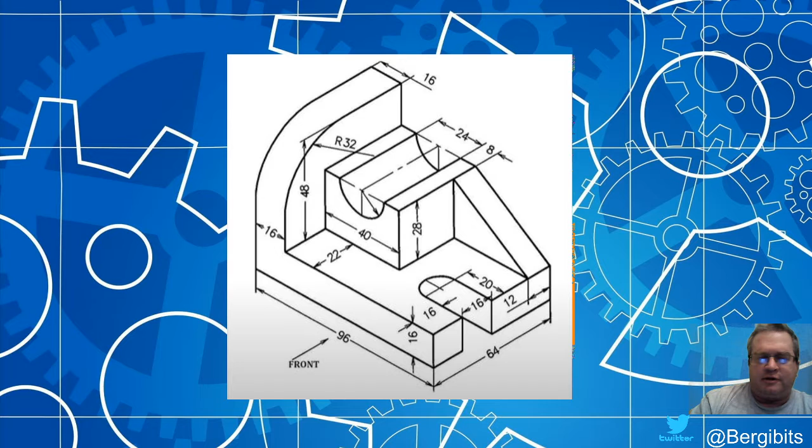All right class, we're going to learn about building a sketch in Autodesk Inventor with an isometric sketch. First we're going to build this base, which is 64 by 96 by 16, 16 thick, 96 long, 64 wide, in millimeters. Then we're going to build this, and then this, then that. All right, let's get started.

First you're going to go to File, New, Create New. Go to Standard Millimeter, Create. Then we're going to select 2D Sketch, and select the XY plane.

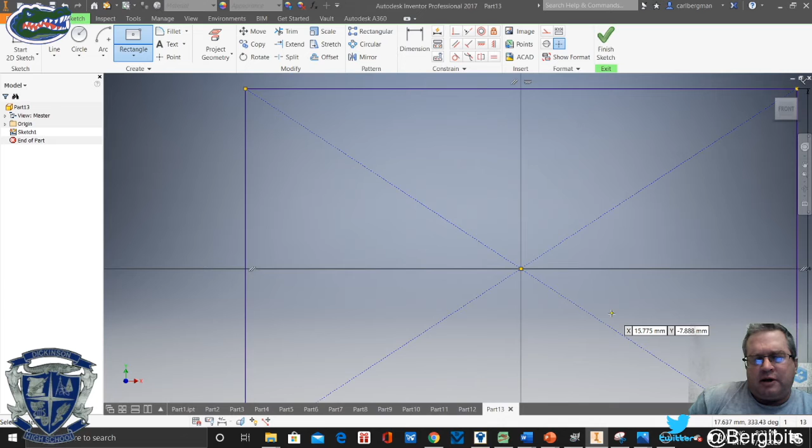We're going to go to Rectangle, create a rectangle from the center. Hover over the green, make sure it's green. We're going to go 96 by 64. You can push tab, it'll switch you from box to box. Zoom out a little bit so you can see what you're doing. Check your isometric sketch, 96, 64, correct.

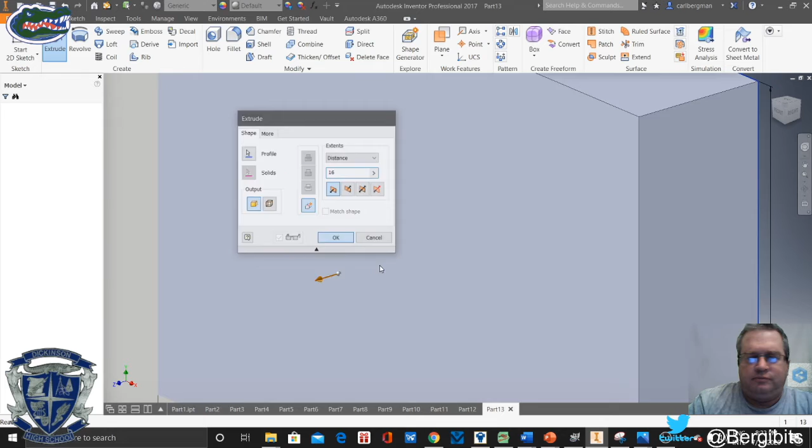Now we got to go 16 on the extrude. Right click, OK, done with that sketch. Now we're going to extrude, we're going to go 16. So I've got 96 by 64 by 16.

Now we're going to make that rectangle on the back stand up, and it's going to be 16 millimeters wide by 48 tall with a 32 on the fillet.

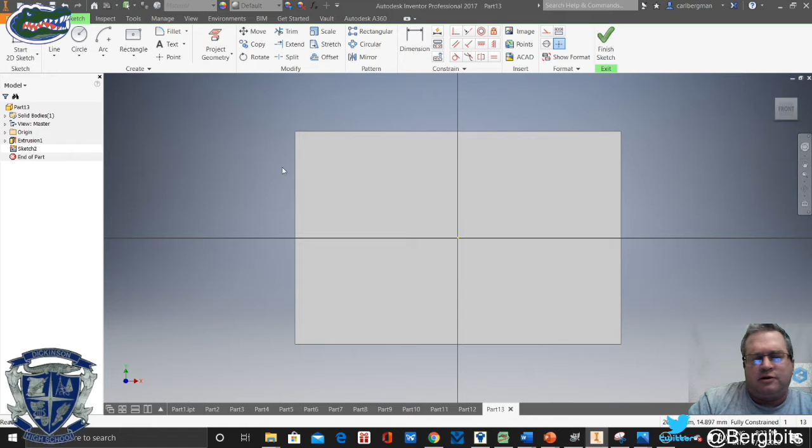Select the surface, go sketch, and we're going to create a rectangle, just a 2-point. Make sure you hover over and make sure it's green so it lines up with that corner. Just selecting where you want to go, you click, and we're going to have to do the collinear constraint tool. It lines it up, so now you're lined up top and bottom.

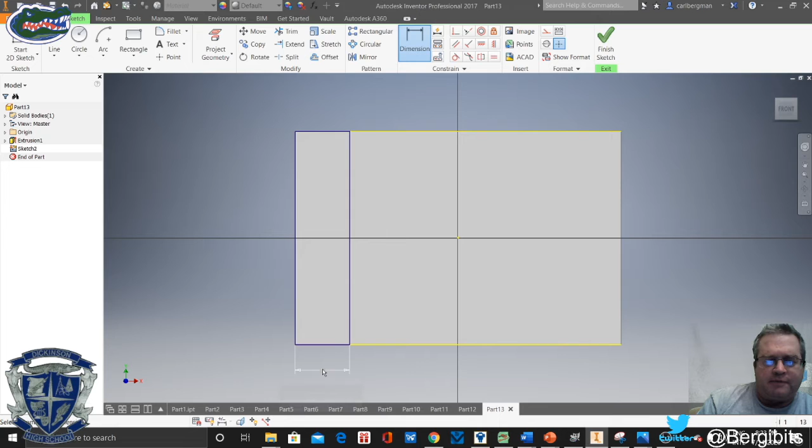We're going to go dimensions, and you're going to go 16. Click, hold, and drag on the dimensions. Right click, OK, finish sketch. Now we're going to extrude - told you we're going kind of fast. We're going to go 48, extrude, and we're going to flip that around.

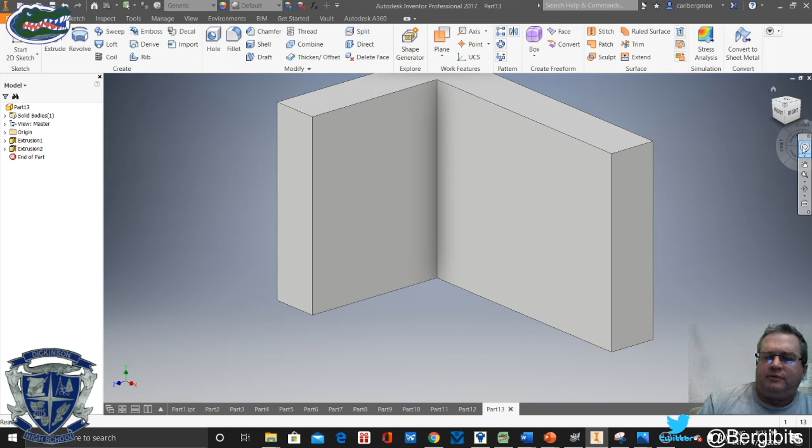Check, OK, it's going to be a 32 on the fillet. So you can click, hold, and press shift, and it'll rotate around the axis there if you want. Go left a little bit, bring it down. All right, get rid of the navigation tool. Yeah, that's good enough.

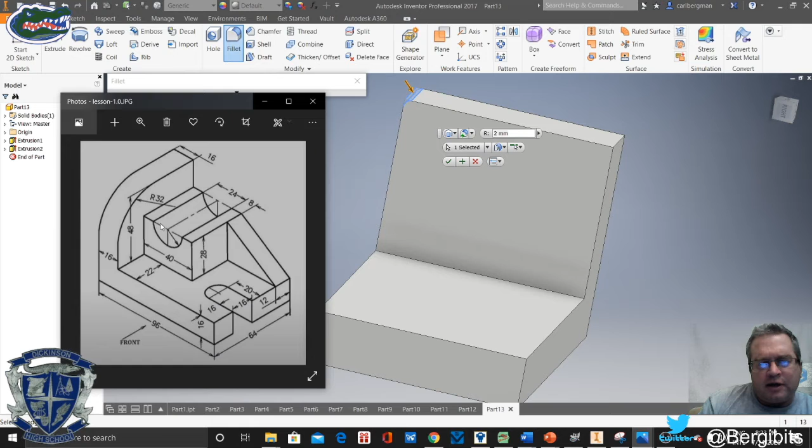All right, now we're going to go fillet, and you're going to click that edge, and it's going to be 32 on the fillet. So you're going to minimize that, bring back, go, put in 32, and click your check mark. There you go. That's the back side done.

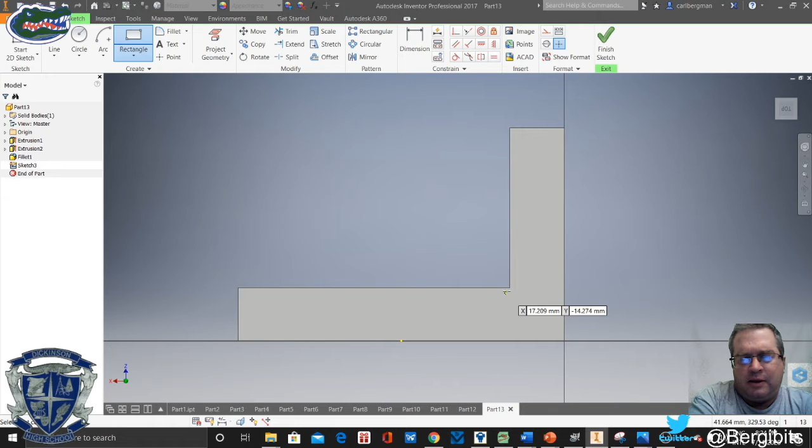Now we got to click on the surface, sketch, bring it down a little bit, and we're going to put a rectangle anchored into the corner. Hover over, make sure it's green, or it's not going to line up right. We're going to go 40 by 28, I believe.

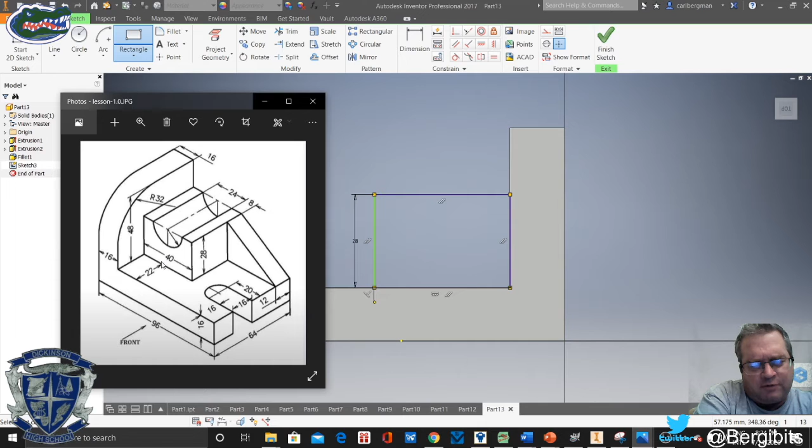40 by 28, 28 tall, 40 long, and we're going to go 42 deep because you got that 22 right there, and then the 64 on the base. Well, 64 minus 22 is 42, so that thing we're building right there, we're going to extrude 42 millimeters. We're going to click OK, finish sketch, and we're going to extrude 42 millimeters. And we're going to select that second one to reverse it, go in the opposite direction.

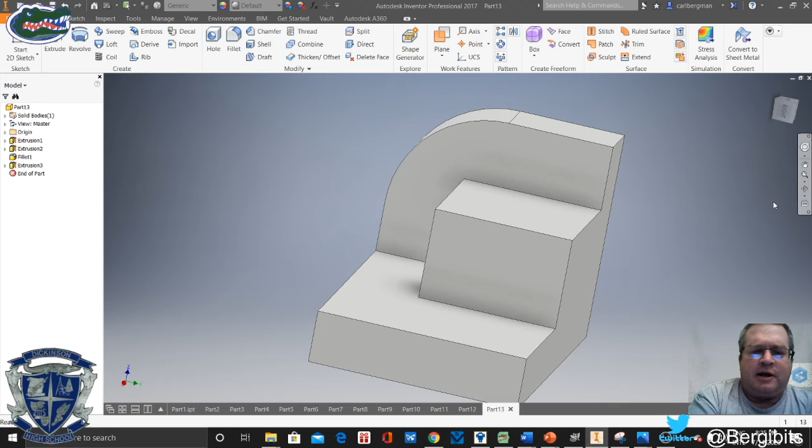There we go. Now we got to cut that semicircle in there. Select the surface and sketch, bring it down a little bit. All right, now we're going to select circle, and we're going to hover over until we get the green dot, and that'll be the center.

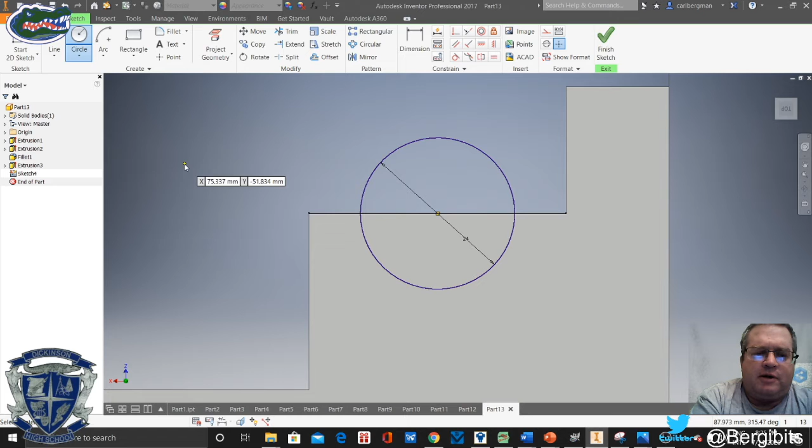And then we're going to go 24 millimeter. 24 millimeters is going to be the center of your line and your circle. So 24, click, check the diameter, there it is, 24, and we're going to right click and click OK. Finish sketch, and we're going to extrude. This time we're going to cut, and we're going to go 16.

And we're going to go that direction, and then we're going to press OK, and there he is. Okay, going pretty quick.

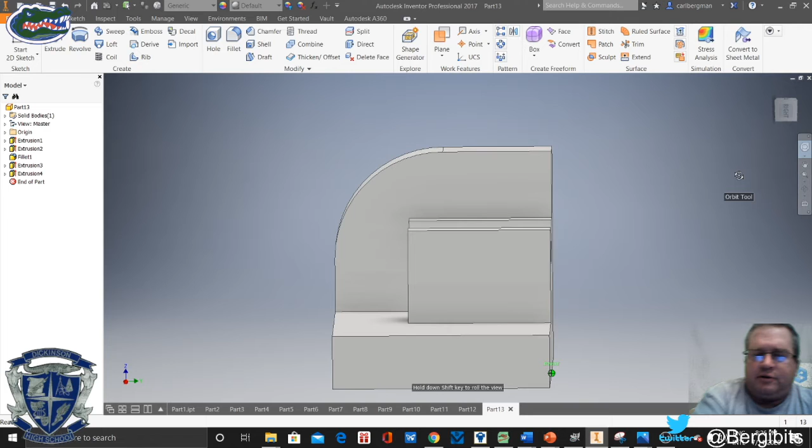Now we're going to click on that surface and click Sketch, and we're going to build the little cutout on the bottom there. We're going to select line.

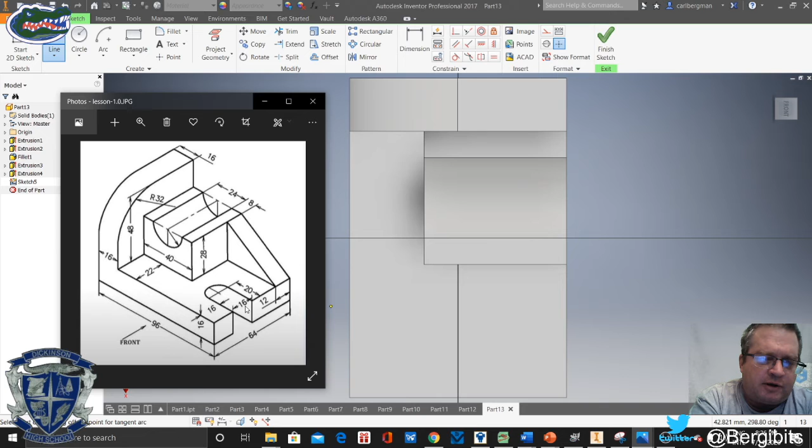So it's going to be 16 on the inside and 16 from the edge to the cutout, and then 20 on the height. So we're going to go just sketch it in there. We'll fix the dimensions later—you just want to get the basic shape.

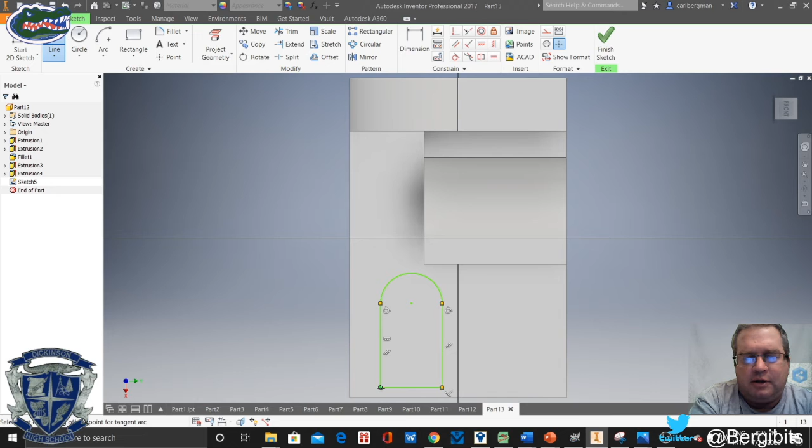Click once, it doesn't work. Click again, go back, click again, and then drag and hold it, and it'll create that arc for you. Then click, click, and click. Takes some practice. Click, right click, OK.

And we're not going to click Finish Sketch yet because we don't have the measurements. Collinear alignment on the bottom.

Let's make sure we can see the bottom. All right, collinear alignment, and there it is. And we're going to go dimensions.

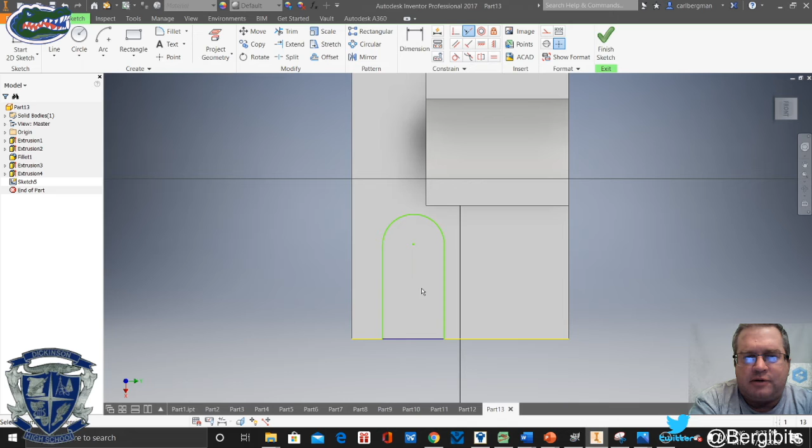Click, hold, drag, 16 millimeters. Click, hold, drag, 20 on the height.

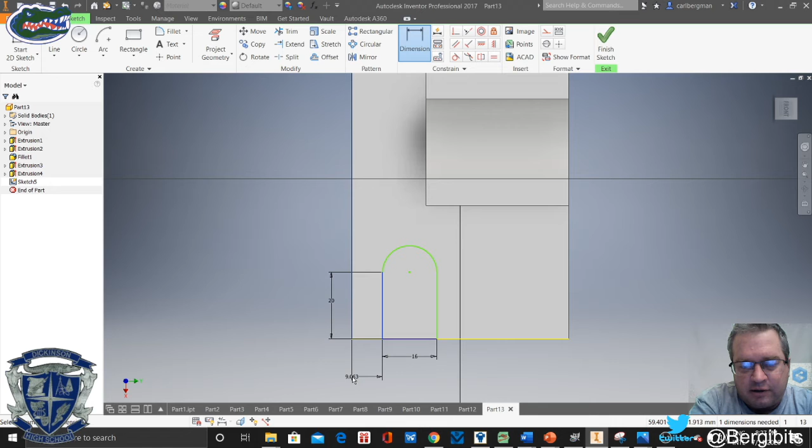This next step is a little bit tough, it's going to take you some time. But click, hold, and drag—I don't do it right the first time. I'm doing Monday night quarterbacking here because I do the video first and then I go back, so I click, hold, drag, and then click, hold, drag. You have to click twice to get it to come out and do a right-hand turn or left-hand turn.

And there we go, we got 16. Typed in 16, click OK. And then Finish Sketch. And then we're going to extrude.

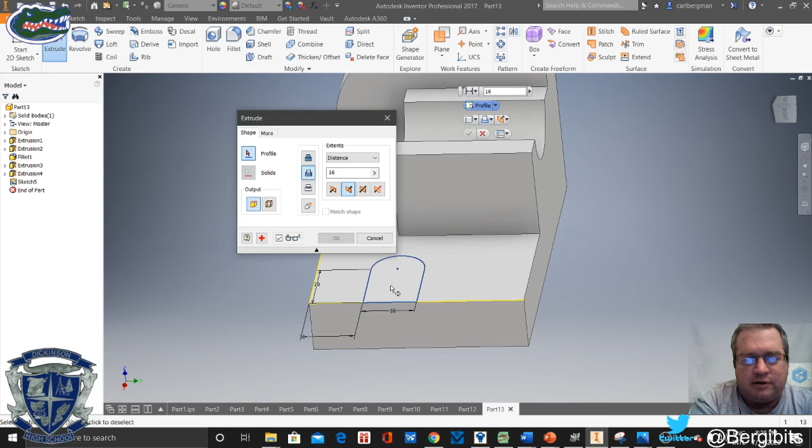Go extrude, and we're going to go 16. And then we're going to go opposite direction, and then cut. Select it, and there we go, and then say OK, and we're done.

All right, so when you create this stuff in Inventor, you export it as an STL file to your 3D printer. It's going to print whatever filament you have in your 3D printer.

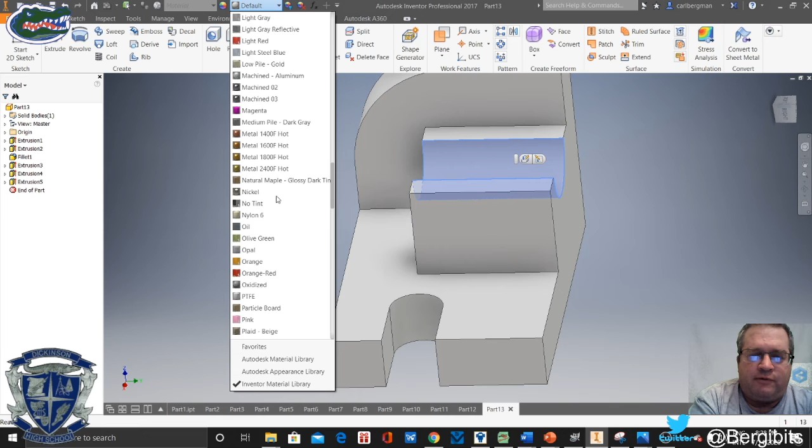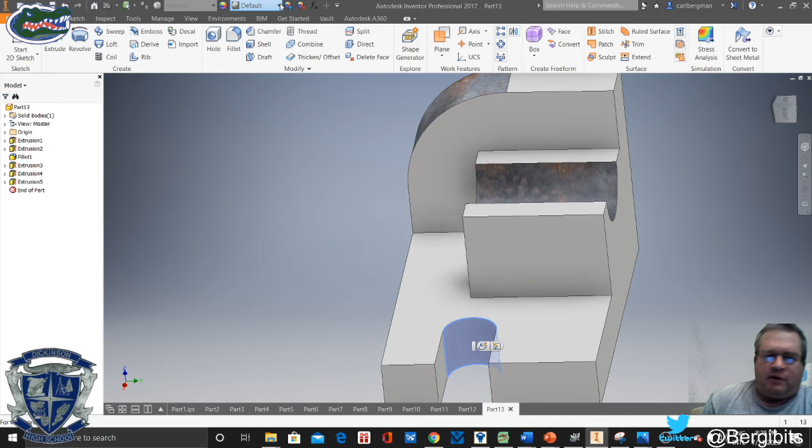We might have one of those fancy liquid resin printers, which is pretty cool. But you want to make sure your measurements are correct the first time, because some of these pieces that you create can take 4 or 5 hours to print, and you want to make sure that everything's good, or it's just a waste of 4 or 5 hours plus a lot of plastic.

So what do you create parts for? You can build a robot. You can 3D print things that go in cars. You can 3D print all kinds of stuff.

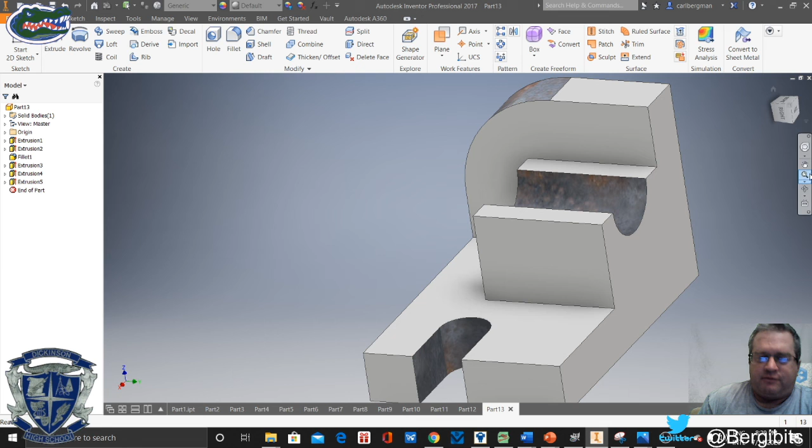So there you are, that's lesson 1 in Inventor. Once you build a couple pieces...

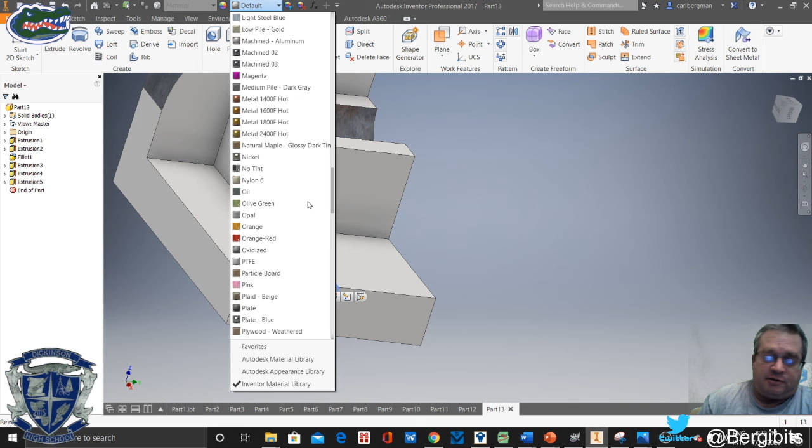Here I am, I'm clicking the surfaces and then changing textures and stuff just to personalize it, but that doesn't mean it's going to come out that way. I'm just having some fun with it.

So you want to make sure you save these so you can go back and look at your progress and learn from your mistakes. I've made plenty of mistakes, but the good thing about Inventor is you can always go back and replace parts—you don't have to start from scratch.

In a couple lessons, I'll show you guys how to go in and delete pieces and copy and paste pieces. A lot of fun. So anyway, that's it.